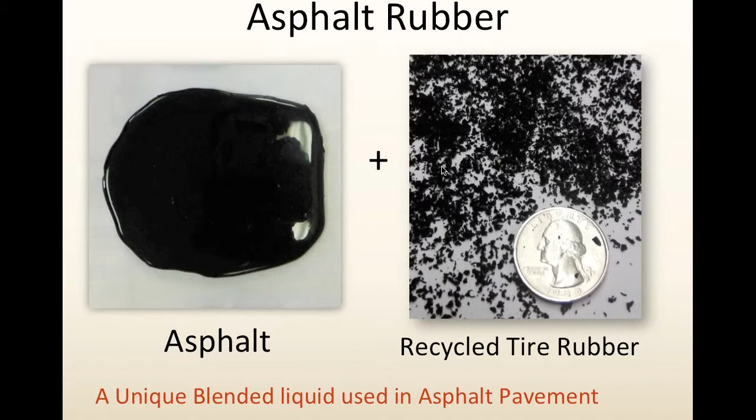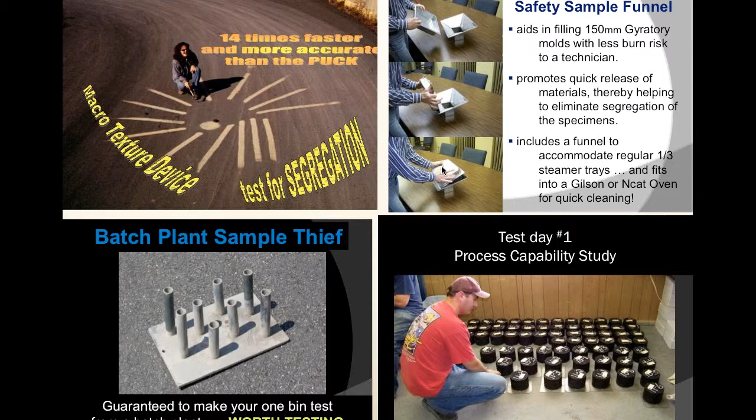Our team that I work with, truly what we are best at is turning a concept into a reality. And a lot of the people that I work with in universities and so forth love to work with us because what we do is stick the model into reality and then kind of hand it back over to be studied, finished product.

Now, like I said, this is a real crude, my own version of kind of like Asphalt 101. What's a pavement made of? Okay. Typical pavements are dense graded. As I mentioned, 5 to 10% of the mix is liquid. Sand and stone are about an even split of the other 90 to 95%. Dense graded mixes are designed to be just that. They're dense, meaning the particle matrix fits very tightly together and not much space in between.

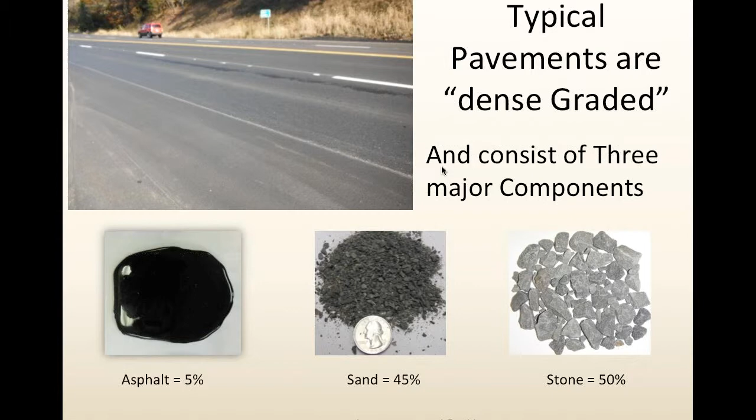Gap graded mixes have about half the amount of sand. They simply allow more void space, so you can put a mastic in there or just have air voids. Open graded mixes, one step further, use about half again less sand, and they're kind of just like larger aggregate stone particles, leaving lots of space in between.

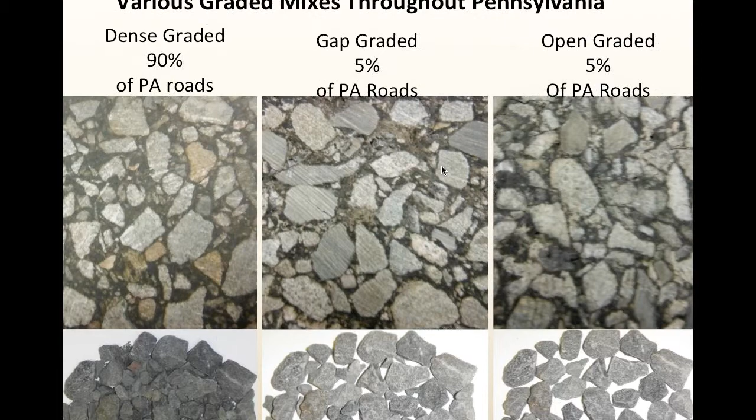And this is just basically a picture showing on the left what a dense graded mix looks like from a saw cut, and on the bottom of that also what the stone matrix is in there. Next, in the center, you see what a gap graded mix looks like, and finally an open graded.

By and large, dense graded pavements are what you find across the United States pretty much. They're economical and versatile, partly because they're a tight integration of stone, and there's not a whole lot of room for asphalt. But if they're combined properly, you can minimize the amount of the asphalt, which is the most expensive component, or I'll call it glue, some call it binder, to hold it together.

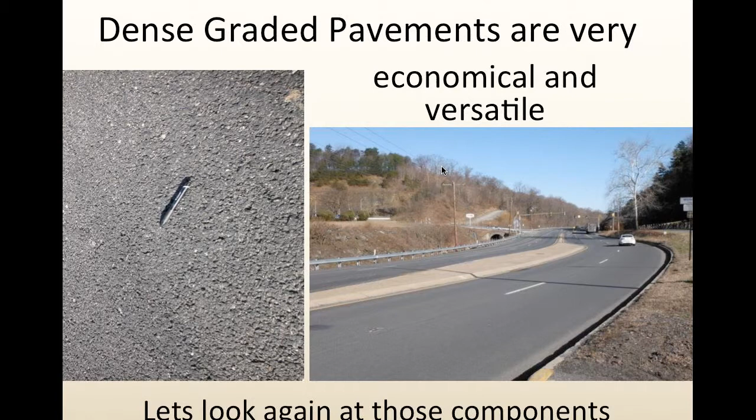And the aggregate portion, most of the surface courses are a sandstone or a gritty, abrasive stone to help with skid resistance, and just about any kind of sand can be used in there.

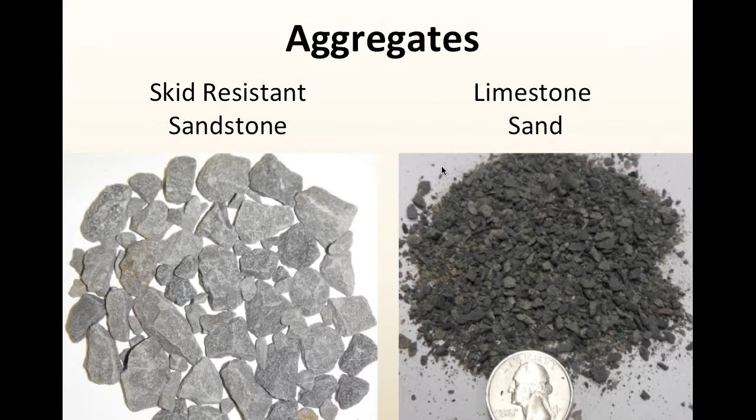All right, liquid asphalt, the fun part of this, is basically the bottom of the barrel from refining. I like to liken refining to pressure cooking. Off the top you get gasoline, naphtha. The next lift down, you might get fuel oil, diesel oil. The next, motor oil, maybe. Once everything else possible is removed, the bottom of the scum barrel is asphalt. That's what we use in pavement.

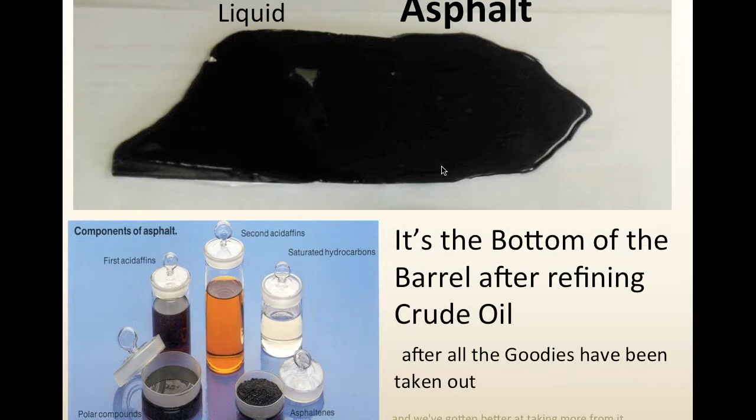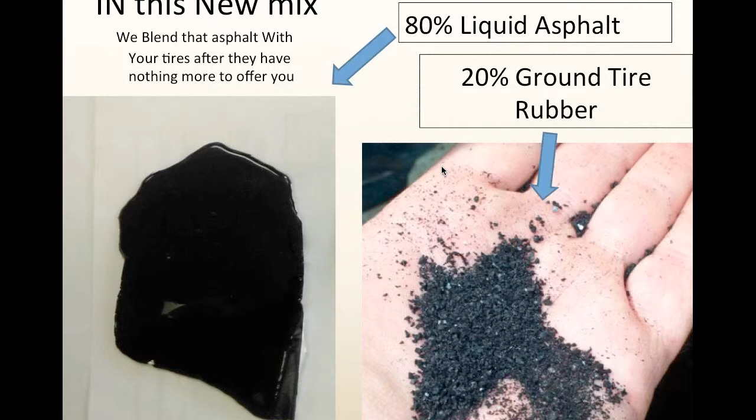In the new mix that we're talking about today, we're blending 20% ground tire rubber with 80% asphalt. That could be as low as a 90-10 split. The asphalt, the stiff liquid that comes from the bottom of the barrel, and the ground tire rubber product, of course, left over after you're done using your tires. As a result, what we end up with is a really nifty asphalt rubber blend that's a far more flexible and durable liquid.

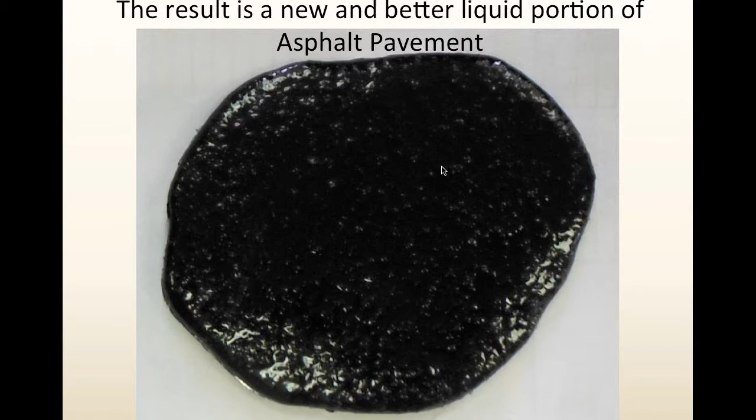It's a nifty blend. It looks kind of like oatmeal my dad used to make us eat. It probably tastes better.

In the past, PennDOT, at least, and our industries resisted using rubber and a lot of recyclables, for a lot of good reason. One was the ISTEA Act, which tried to stuff it down the industry's throat. And to be honest, the department, the industry, everybody put their gloves on, and rightfully so. Basically said, don't cram tires down our throats. We don't make them.

It was logical that everybody resisted it. For me, an experimental freak, it really didn't matter because I just had a lot of fun playing with it. So all that resistance kind of left me as the lone guy out there playing with rubber, kind of like being a doctor in the West.

And I've been playing with rubber since the early 90s. And to be honest, I have no failures, at least none that I know of. I've had a lot of mistakes, and even my mistakes seem as though they've held up quite well.

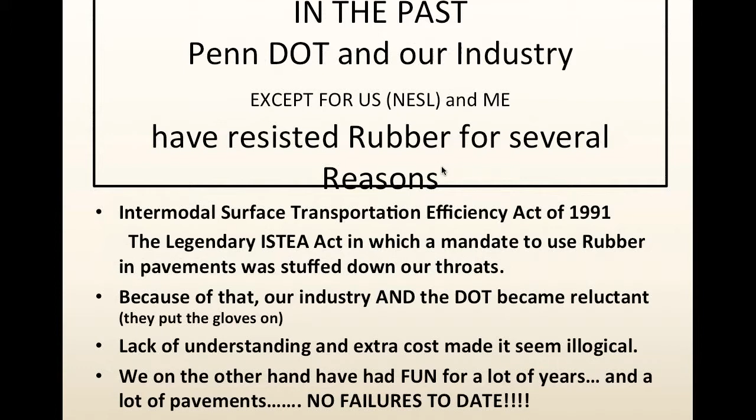All right, in the past, although wet blending is what we're talking about today, which is actually the best way to do this, most of my experience has been with dry rubber blending, because it was economical. To do wet blending takes a large investment into blending equipment, and nobody was really willing to stick their necks out and start placing large enough quantities of asphalt rubber to afford bringing in blending equipment.

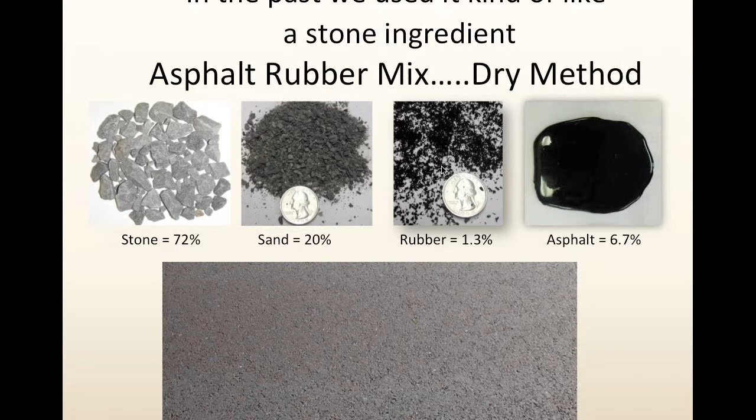An example, you've got to forgive me if I skip ahead as I digress. One example is one section of pavement that we did, looking at maybe a finished blacktop of, ballpark, say $60 a ton. Just the use of the blending equipment cost an extra $15 to $20 a ton. It's huge to do the wet process. So for many years, we used it as a stone ingredient. But rubber has unbelievable value as a stone ingredient.

All right, so why rubber? Why now? We need something to help with the infrastructure crisis that we're in. Actually I do know most of the states are in similar infrastructure, I'll say, ill repair that we are in. As much as I hate to say it, it's not going to get better fast.

One of the problems for our public, and really on the political side also, is the public is not going to realize why the roads are falling apart. They're not going to want to understand the fact that we've not taken care of roads. And because roads look so doggone good all the way down until they're ready to fall apart, it's hard to justify spending money.

I found it funny yesterday. My girlfriend was complaining about delays on a bridge deck that was placed about a year ago, and I explained to her it's a concrete sealer they're putting on that, even though it seemed like they just worked on it last year. She said, oh, okay, I'm okay with that. And she went on to say, I'll quote her, I'm a firm believer that it's easier to maintain than it is to redo. I just thought, wow, could you take that a long way.

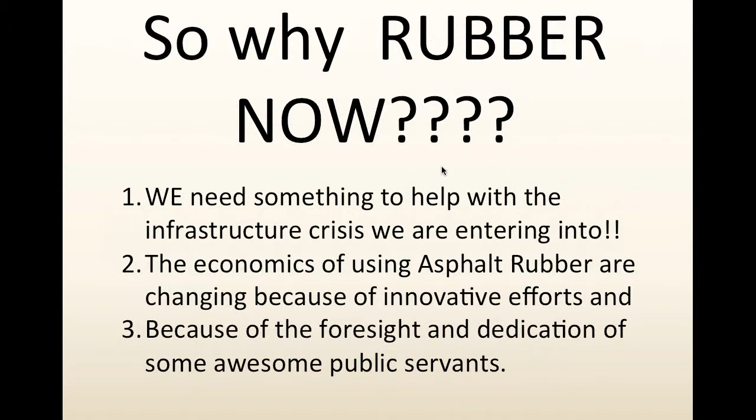At any rate, one of the problems is we have a lot of roads that are in disrepair. And asphalt rubber is going to help. It's not going to fix everything because we've got a lot of stuff that needs redoing.

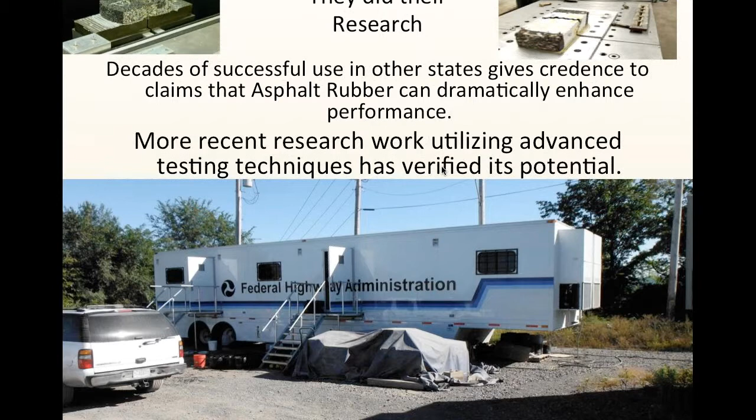All right. Here's a shot of the Fed's trailer on our property. I think they were parked on our property for just about an entire season, and we really didn't mind all the electricity they used. But seriously, there's a great report coming out. It's not out yet; they tell me they're just a little slow to put their reports out. But I am told they have nothing ill to report. Everything seems favorable. The performance testing they've done on this mix is very good.

I just threw this up. A lot of these presentations I've given in Pennsylvania alone, so I use MassDOT because they're close by. But I know there are a lot of other states here, Texas, I don't know who all. There are a lot of states with a lot more experience in rubber pavement than I have. But just use this as an example of how this product's growing.

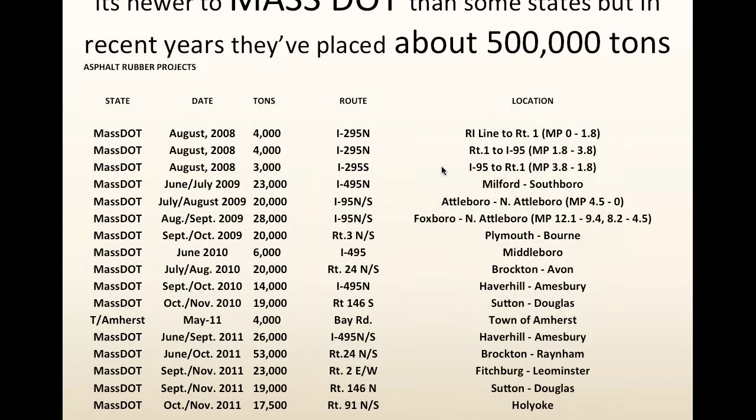We placed several projects in Pennsylvania. I-78 was the first substantial size project, near Allentown, PA, about 30,000 tons, placed in 2012. Snyder County, SR-15, our company placed that project, and it is looking unbelievably good. We're going to place another 30,000 tons with a sister company, Valley Quarries, near Gettysburg. We're just gearing up now to get that project underway.

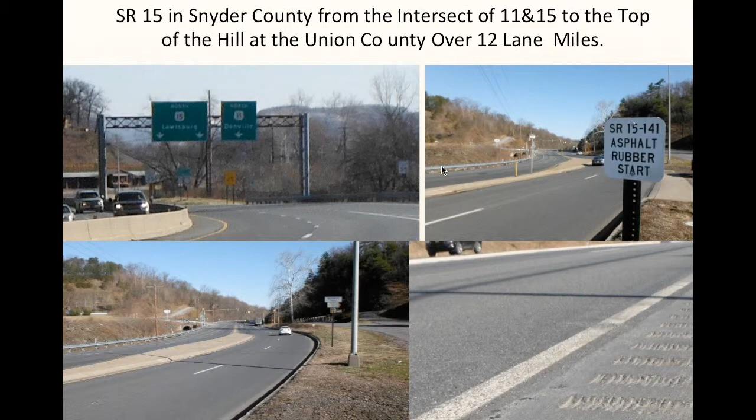These are just some pictures of the project. If you're in Snyder County, Pennsylvania, you might notice this at the intersection of 11 and 15, near the Susquehanna River Bridge near Sunbury.

We paved this section from the bottom of the hill to the top of county line, all 4 lanes, and we also did the ramps on the other side of this Route 61 bridge, which takes an incredible truck pounding. It's going to be great to watch this.

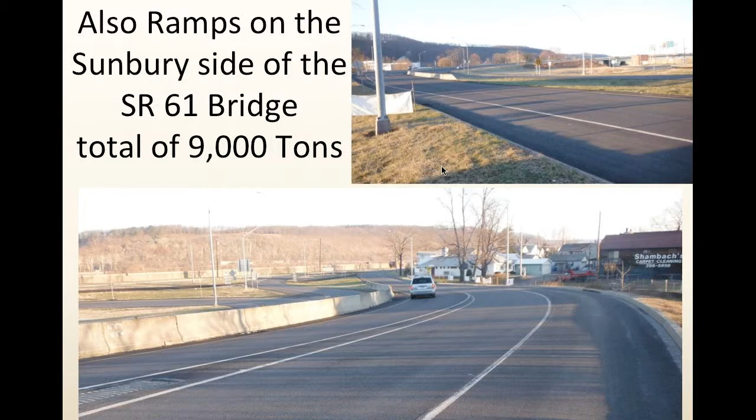Here we're just taking a look at the liquid asphalt. 6422, these numbers are ratings that the Superpave system has come up with. It's called a performance grading system. The numbers are actually temperature ranges - originally the system was based on temperature ranges.

6422 is typically the age-old asphalt cement we've been using. The center is the polymer modified I was discussing. That's considerably more expensive - if we're looking at $500 to $600 a ton for a 6422, you can throw an extra $100 to $125 a liquid ton for the mix with the plastic asphalt in it.

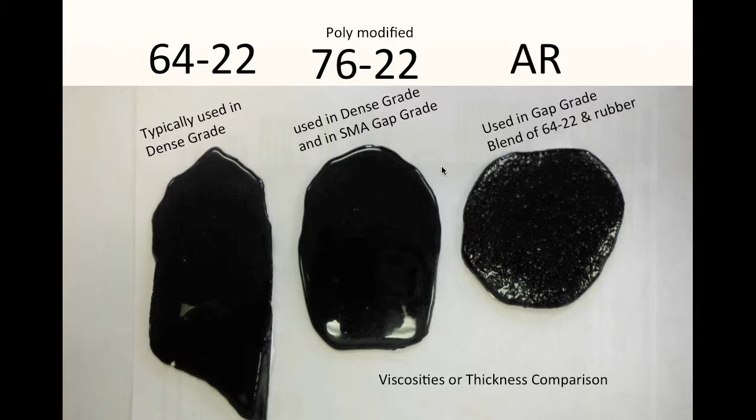The asphalt rubber that we did on this project, and the material I'm here to talk to you about today, uses a wet blending method. I have an unbelievable history with rubber and knowing the value of rubber - there's many different attributes to what rubber can do for pavement. But the wet blending system, I've only seen it used outside the laboratory for a couple of years here, and it is by far the best way to apply it. I'm convinced.

In the past it was the most expensive, but hopefully what's going to happen is the cost will decrease as the use increases.

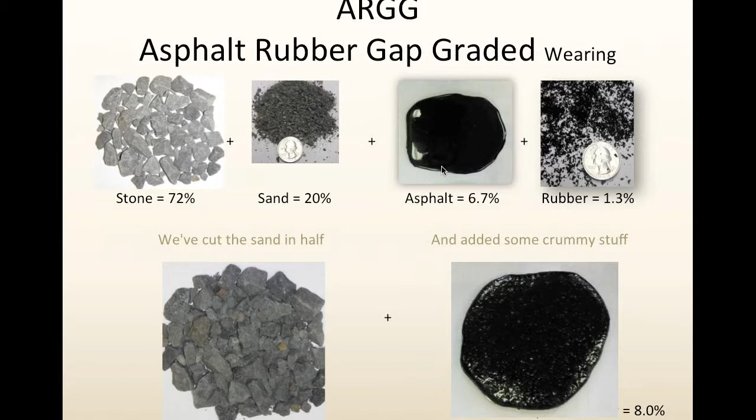In the asphalt rubber gap graded wearing course we're looking at, you can see the components here. The sand's been cut in half, so it's about a 72-20 blend of stone and sand, and then the asphalt at basically not quite an 80-20 blend - you're looking at 6.7% liquid and 1.3% rubber blended together.

As I mentioned, one of the other attributes of rubber is that it's an impenetrable air void. Its flexibility also allows it to push back, which when pounded by heavy truck traffic resists over-densification, or what ends up in rutting and flushing in our pavements. I'm sure you've seen rutting and flushing if you've driven anywhere in the United States.

So how did we blend this mix? We basically kind of happened into it because we're experimenters - we originally took this job on and were going to hire an outside blender. But for variable reasons, and because of the faith afforded by the districts to let us work through the problems and design our own mixing system, that's what we did here. We developed our own blending system, which will hopefully be the beginning of other people jumping on board and the cost of blending coming down.

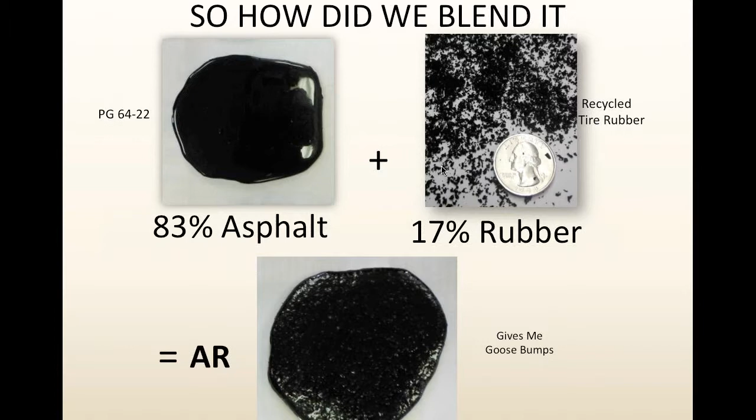This is just another picture of the blending unit we developed - this is the first one. The one we're setting up for our Gettysburg project will just be the next step better. As an inventor, that's what happens - before you're done with it the first time, you're already recreating it.

This guy here I'd have to mention is one of my best friends who nearly killed me during this project - one of our IT guys who's just an absolute genius. These are the kind of guys that facilitate doing fun experimenting like this. I just can't give them enough credit. We pull something out and say, hey, this might be good, and these guys just roll up their sleeves and go at it.

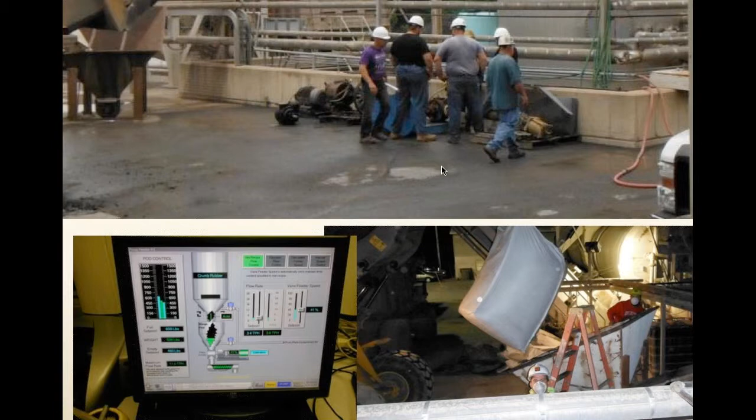It's just some more of the guys who helped throw this together, or look at some of the automation we have. And on the lower right, night shift paving crew dropping some rubber in the bin.

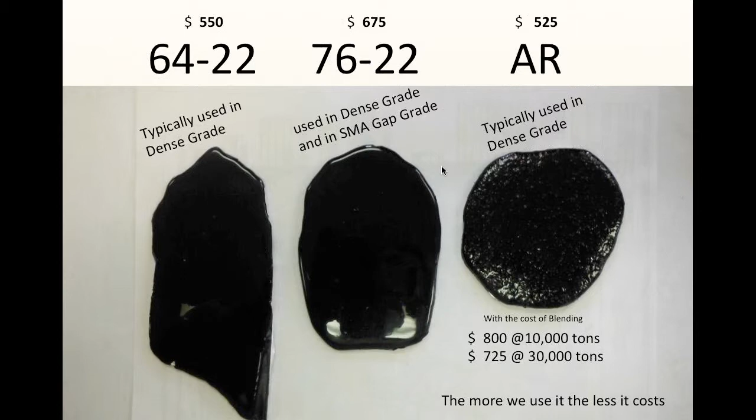Standard asphalt, say $550, polymer modified 7622 at $675, and the asphalt rubber coming in at $25 cheaper than the standard. Now, that's without blending costs.

As you can see here on the bottom, $800 a liquid ton. If you're blending 10,000 tons, it drops down to $725 at 30,000 tons. But like Scott Christie said when I first presented this to PennDOT, he said those blending costs will go away, and he's correct. So the more we use it, pretty soon the cost of blending will just be part of our regular equipment. That's what's great about where we're headed.

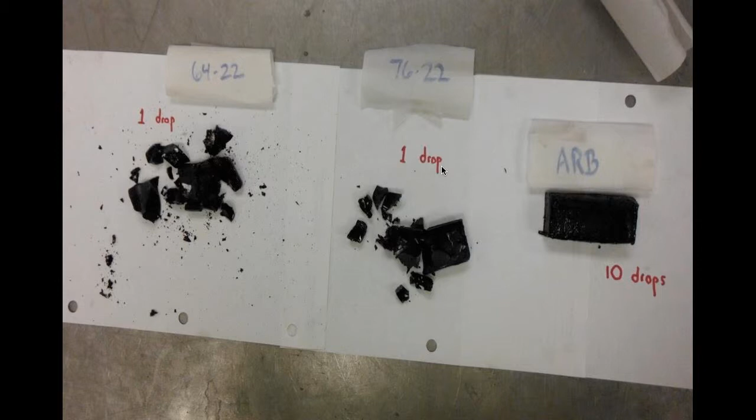This is kind of a fun picture I have to share. I originally made sheets of the different liquids so that when I did these kind of dog and pony shows like we're doing today, except usually I do them in person, I'd have little samples to hand out. My technicians in the Lewisburg plant made sheets of these and had them stored in the freezer, planning to cut them up. My son-in-law, who's the technician for me there, happened to drop a large specimen down in the freezer, and these guys were like... I could see when they came to me looking sheepish that something went wrong. They were like, 'Oh my God, Anthony dropped a specimen and shattered everything.' The interesting part was the asphalt rubber didn't break, and that spawned a whole series of experiments I did next.

But what you're looking at is 6422, a 30-gram specimen, I believe they were all 30-gram, same size specimens. I used a test hammer that we use in the laboratory, and dropped one drop. These were cooled to about 35 to 38 degrees, all the same temperature. One drop on the 6422, you can see how far it shattered. The 7622, the more expensive one, didn't break down quite as much. Ten drops of the hammer on the asphalt rubber absolutely blew me away.

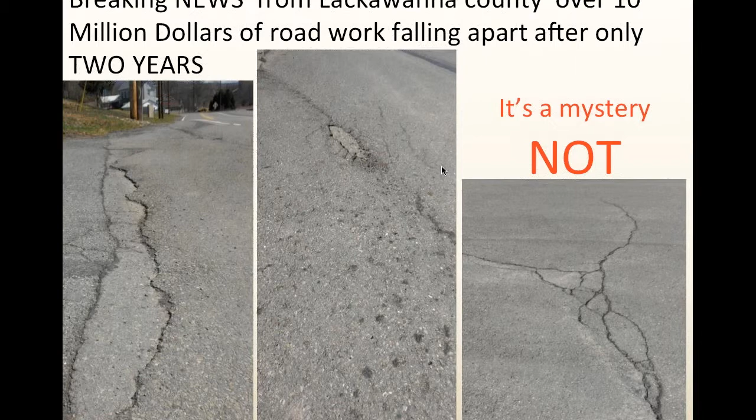This I found interesting, an incredible story, and not far from where I live. Breaking news, they said, oh my God, this pavement's falling apart after only 2 years. It was like they were looking to see what the mystery was. But as soon as I saw it, it wasn't amazing to me. One of the points I tried to make to the local people and local news media is, it's kind of like my girlfriend had alluded to: if you don't maintain them, they're going to need redone. What I said about this was you can't put something on top of nothing and expect to have anything.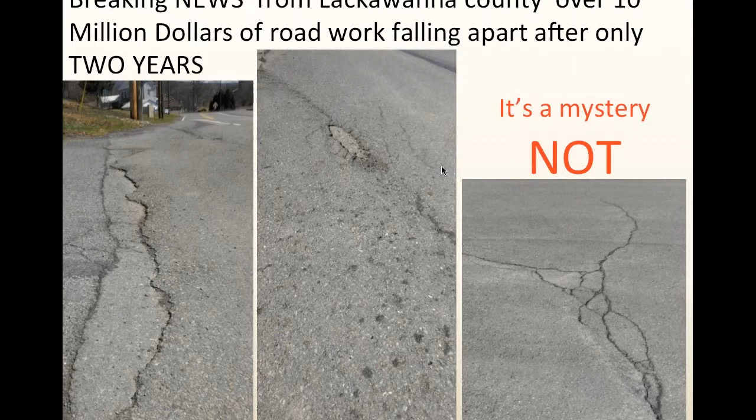They put a thin surface coat down on a road that's just absolutely destroyed. So it's going to be hard to keep these roads alive without spending a lot of money.

This is just a slide expressing the same thing I've already talked about. There's micro seal, some of our people use, some of the DOTs are using this micro seal. All it does is extend things, it gives you another 2-3 years until you have to do work on a road, but it's better than letting it completely fall apart. That's why we see these kind of crappy looking seal surfaces that they put down, and you wonder, you see them start to break up in a couple of years. It's just because there's nothing underneath.

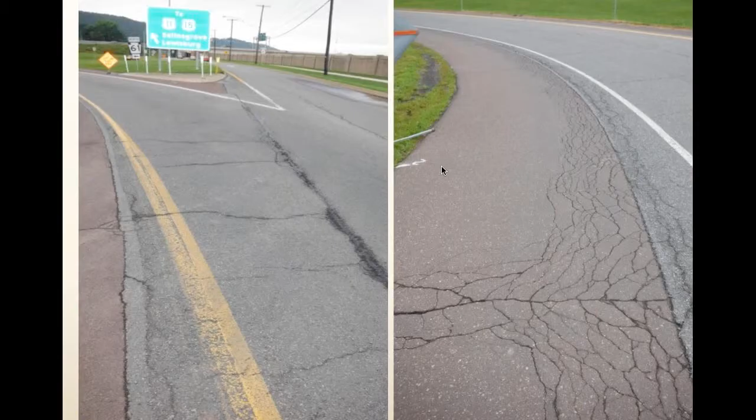This is just a picture of the ramp area on the Sunbury side of the bridge I was talking about. I wanted to show this because you can see the kind of deterioration we're talking about. This is basically what we paved over, and that's why it's going to be exciting to watch this. This material that we placed is unbelievably durable. I've boasted that if this stuff doesn't last, I'm gonna retire, which I probably should anyways. But nonetheless, I'll honestly tell you that this mix is the first mix in 35 years that I can honestly tell you I would choose to warrant.

At any rate, here's a look at the project on I-78 east of Harrisburg. Our company didn't place this, we just missed the bid. But by and large, it looks like it's really performing well, even though we didn't put it down.

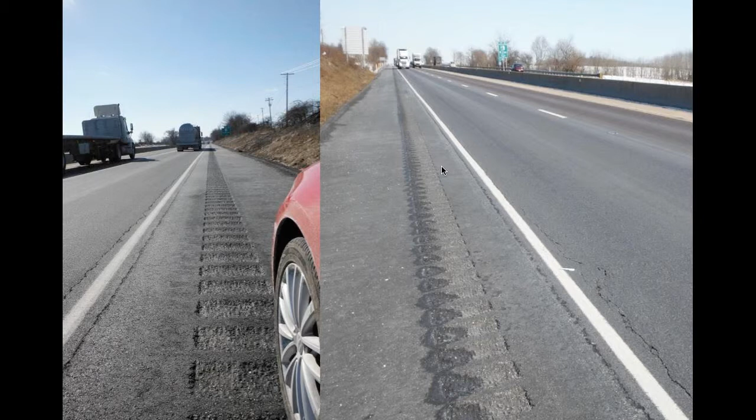Here's a picture before I did one of the first, again I call them pony shows, for the PAPA conference in Harrisburg. I thought I better drive down and see what this pavement's looking like, at least the first one. As I said, this is the I-78 project. Now understand, again like I'm talking about, you can't put something on top of nothing and get anything. This pavement was placed on a severely deteriorated concrete roadway, slab shifting, very ugly chunk of pavement. So when I first came across it, I thought, well, it doesn't look too bad. And in some of the areas I looked at, you can see there's longitudinal cracking that occurs, of course, when we do these what we call mill and fills.

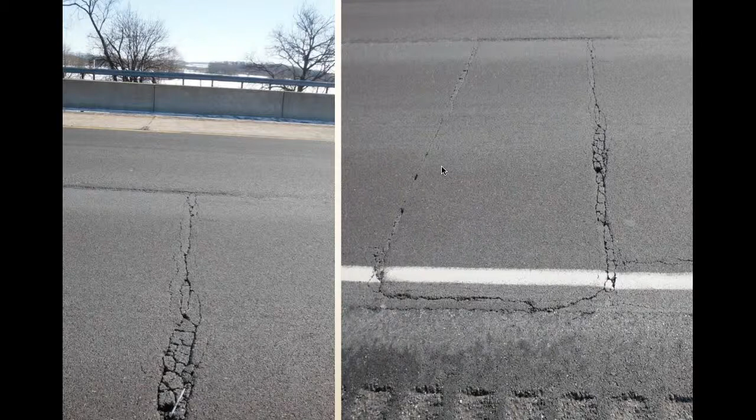There's an offset that happens from that mill and fill, and sometimes there's a shear that happens there. So I wasn't blown away by that longitudinal crack, but the further I went down the road, the worse it started to get, and I kind of panicked when I came across it. As I say, the further I went, the uglier it got, until I got to this point where these patches were reflecting directly up through. I was really upset because I thought, man, I've been boasting this, and I guess I am gonna have to retire now.

But what's really interesting, if you take a look, you can see across the first lane the crack stops. What I ended up finding out was that this cracked portion is in the control strip area that was actually not asphalt rubber, it's the expensive plastic polymer modified mix that you're seeing cracked up. I didn't want to see a cracked up pavement, but it's very, very interesting to look at how this asphalt rubber is well outperforming an extremely more expensive mix. It's impressive, gives me goosebumps.

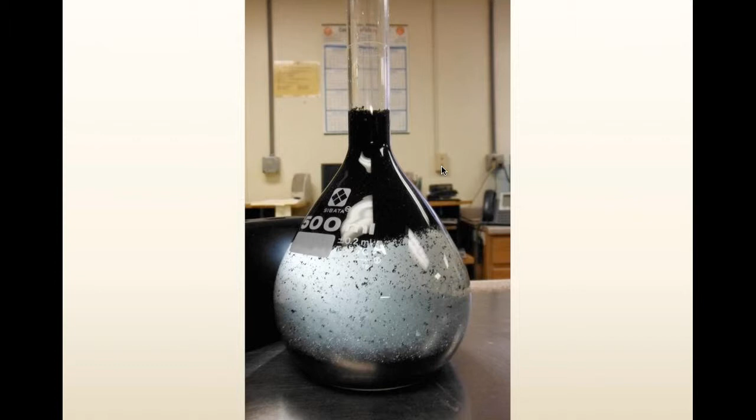The neat thing is when you put this particle of rubber in, the rubber's gravity is also 1. So it kind of, shoulder to shoulder, says to the asphalt, hey man, stay down here. It resists the flushing. Not kind of, extremely resists flushing. I've put unbelievable amounts of asphalt rubber down in pavements, and I have yet to see one flush. Actually, I have yet to see one rut. So I know I'm setting myself up.

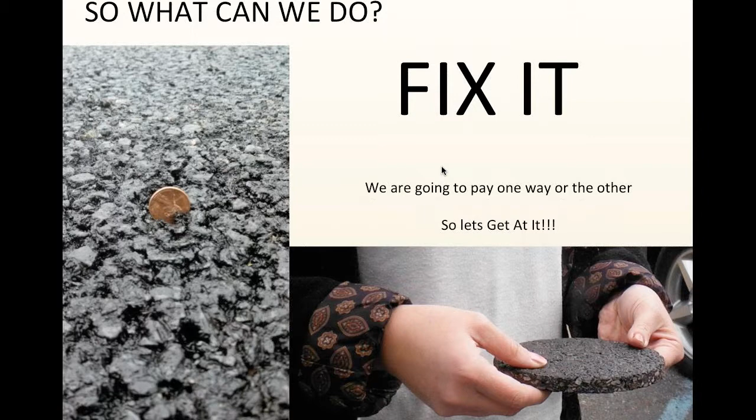This is just, I threw this in here. Some of the states, I'm sure, are adopting to put this asphalt rubber blend in dense graded mixes, the universal mixes that I was expressing originally, where the asphalt doesn't quite fit inside the matrix. So when you go to using a dense grade mix, you should look at a finer grade rubber, maybe even terminal blend, not necessarily.

But one of the other things we have to be careful about is when we look at rubber blended with asphalt, it's not 1-to-1. 6% asphalt plus 1% rubber does not equal 7% liquid. I'm going to say it equals about 6.5. That might even be kind. But by and large, even with the excess of rubber in there, it's still cost effective. It's still cheaper in the end, as we move to getting rid of the blending cost. And I think that about covers it.

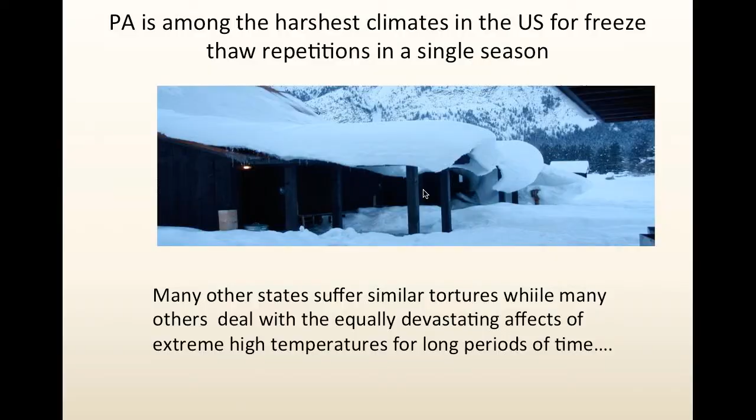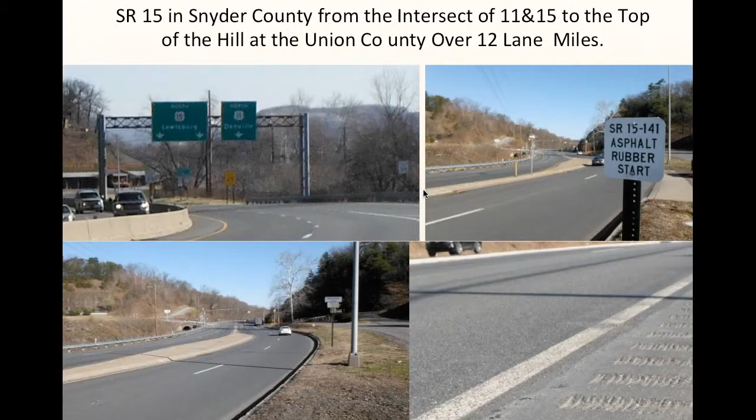This question, they're asking you to review the costs again of the rubber mix. Okay. Can we go back to that? I guess you could, yeah. It's not too far back. That's a good one, where that question was on how quickly the cost of rubber is going to go up. Rubber itself is cheaper than the liquid. And actually right there, whoops, back up. Past it.

Not sure if you can answer this, Greg, but this question asks, how does the asphalt lobby view this work? Don't they want to sell more asphalt? I find that very interesting. I'm always looking out for political things; it always feels like somebody other than a simple guy like myself has got their fingers in someone's pocket. I really don't think this is going to be that critical. I thought the same thing about the polymer modifieds, but I don't think they're making a lot of money. I think the polymers cost what they cost, and there's a lot of use for those polymers. I really don't think anybody's going to make big waves about it.